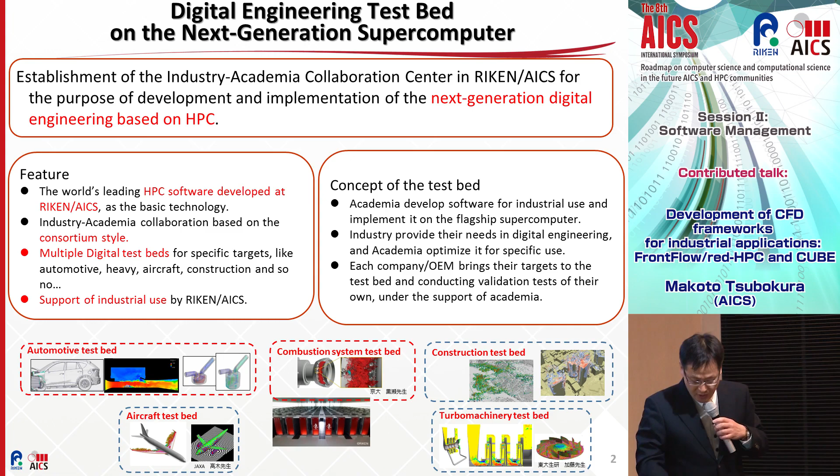So far, we have organized one consortium for automobiles. More than 10 OEMs and suppliers are joining this consortium, and RIKEN is the center of this consortium. But not only RIKEN, but also Hokkaido University, the University of Tokyo and Hiroshima University are now joining. It means we do not utilize only the RIKEN software, but other universities can also bring their own software to develop software for specific industrial use.

And now we are going to prepare the next consortium. That is for combustion systems, like gas turbines or something like that. For this consortium, the leader is going to be Professor Kurose at Kyoto University, and we are also joining this consortium, and they are going to utilize our software developed here.

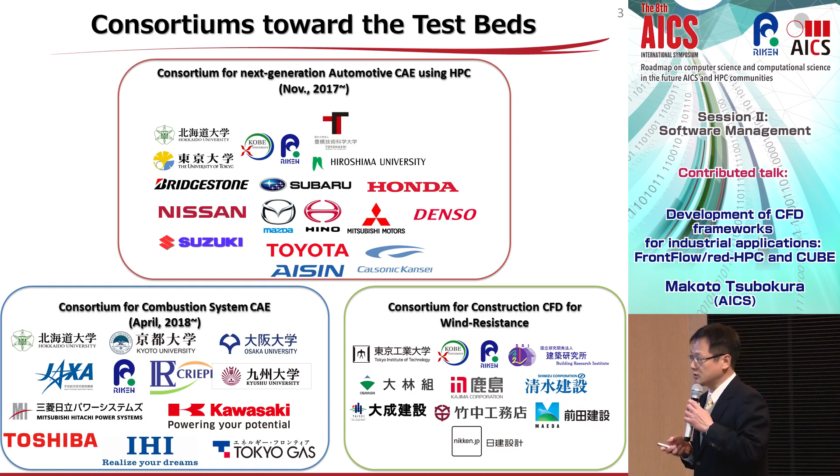And the third one is going to be the construction companies consortium. The leader will be Professor Tamura at Tokyo Tech, and also Kobe University and RIKEN are joining this consortium. Now I'd like to move on to the software development we are now conducting.

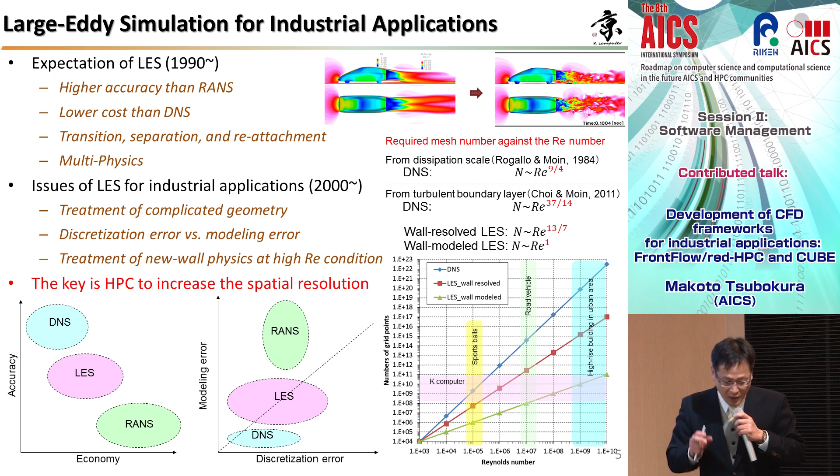Anyway, our main missions at RIKEN is to develop CFD frameworks to treat these industrial targets using a large eddy simulation. Also, I'd like to introduce the FrontFlow red. Actually, the history of the FrontFlow red is very long. It means that the national project launched in around 2002 to develop the unstructured vertex-centered finite volume method for industrial use.

So history is more than 10 years, but in our team, our main mission was to optimize this FrontFlow red on the K computer. So far, the single node performance is about 10%. Actually, this is quite high, I think, for the unstructured finite volume. And for the parallel efficiency, so far they can treat more than around 10 billion numerical elements on the K computer using 10,000 numerical nodes, which is equivalent to 80,000 cores.

The advantage of the FrontFlow red is we use unstructured mesh. So the accuracy is quite high because the complicated surface is reproduced by the unstructured grid. Another important feature of the FrontFlow red is that they can treat the moving boundary problems as shown here. So we can conduct coupled simulations of flows and some solid motions.

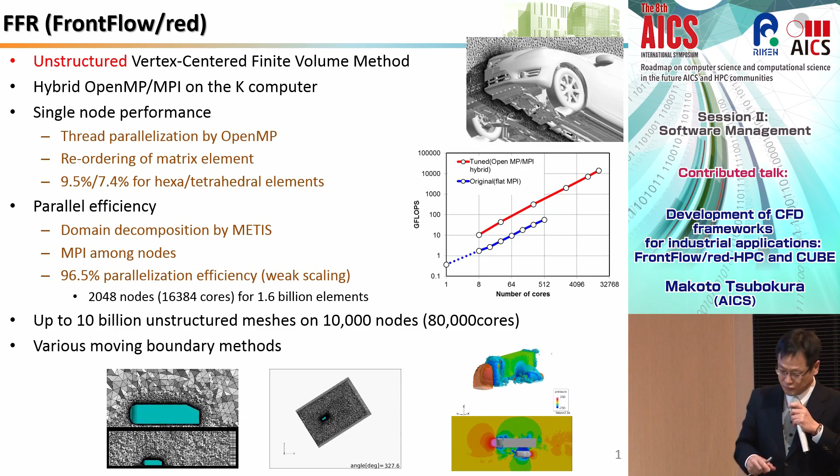First, I'd like to show you the advantage of these types of unstructured grid systems from the viewpoint of the very fundamental physics. As you may know, the flow physics of drag crisis. That is the phenomena that when you increase the Reynolds number, the drag of the sphere or the cylinder is drastically decreased at some specific Reynolds number. This is called the drag crisis.

And the physics is quite complicated, which is relating to the separations of the boundary layer on the surface, and there is a small reattachment, detecting a transition to turbulence or something like that. So if you would like to precisely reproduce these types of physics, you need very, very fine grids on the surface.

If you have a commercial software, just try to conduct these simple sphere simulations, maybe you cannot capture these tendencies. Very small numerical dissipation or something like that drastically affects the transitions, and as a result of that, this tendency cannot be captured if we use software as a black box.

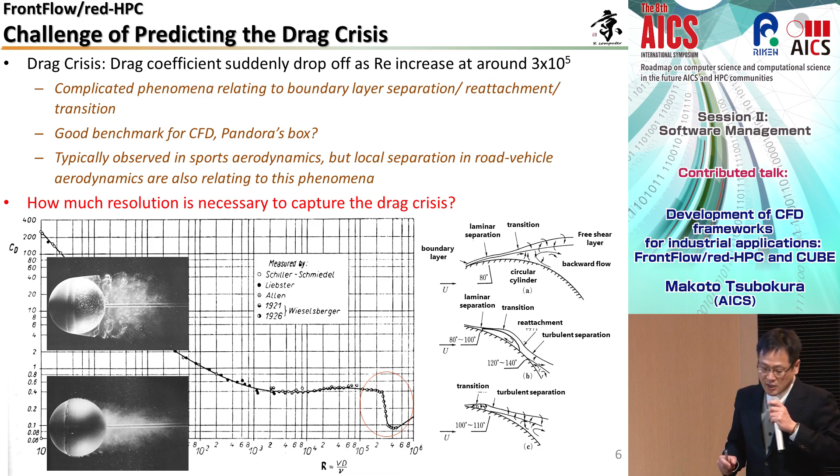So we first conducted these simple sphere simulations using FrontFlow red by specially tuning the grids on the surface from the viewpoint of the reproductions of the boundary layer on the surface. So the parameter to determine the resolution is the theoretical boundary layer thickness on the surface, and we use a prism mesh on the surface and away from the spheres the tetrahedral mesh.

But anyways, here the delta is the thickness of a boundary layer, and we intensively change the resolutions for the horizontal directions as well as the vertical directions. This result is quite interesting. Look at that. This is a drag coefficient, okay? And we set up the same Reynolds numbers for these 4 cases. And we just change the surface resolution.

At the same Reynolds number, at the same numerical conditions, the only difference is the resolutions, and the results are quite different, as you see. If the grid is relatively coarse, the drag is evaluated very low. But if you increase the resolution, it's going to be higher, it's almost double. So if you change the resolutions, the drag is going to change about twice larger. So this intensive mesh dependence test is quite important.

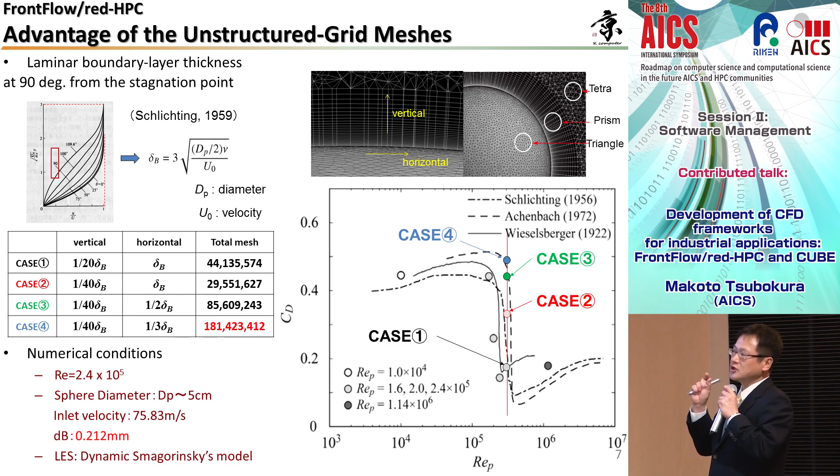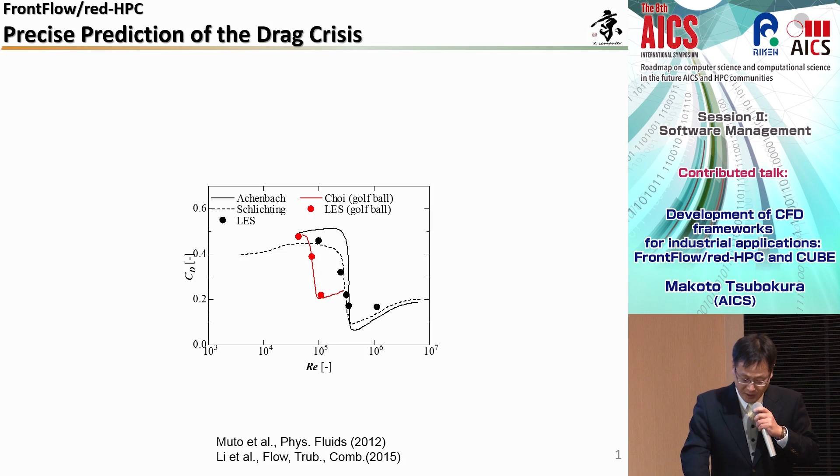But after this intensive test, we can finally precisely capture the tendencies of this drag reduction. Here, this symbol is a result of simulations, and this broken line is a result of experimental data, and this red is a golf ball case, and this black one is a smooth sphere case, and it shows a very good agreement with the experiments.

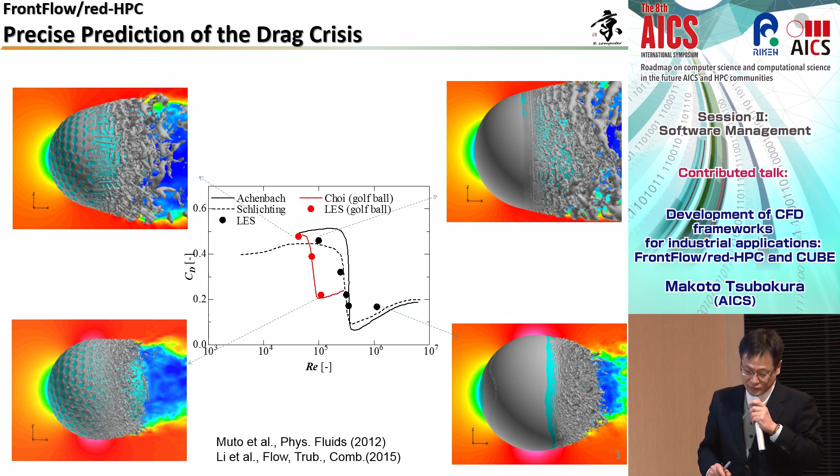This is a well-known phenomenon, but you can capture everything on the surface when you use the K computer, and you can optimize the dimples' shape, locations, and depths based on these simulations. And you can also observe the surface transitions in the case of golf balls. And now we have a collaboration with the manufacturers of golf balls to optimize these dimple shapes.

But anyway, what I'd like to say here is when you use an unstructured grid and you can fine-tune the grids on the surface, you can obtain almost the same results as experiments for these simple geometries. So we have applied this FrontFlow/red to the much more complicated case of a road vehicle. For a road vehicle, the Reynolds number is 2 orders of magnitude higher than golf balls. So we cannot solve everything, but still we can do very precise large eddy simulations.

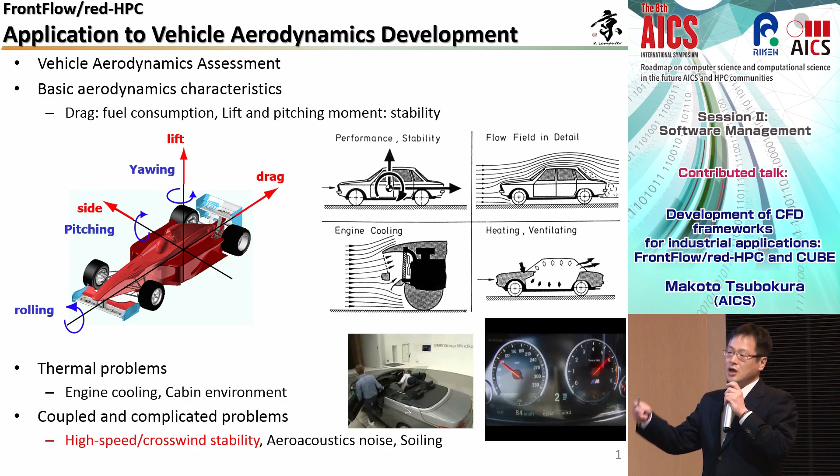Here, our main target is to evaluate how CFD can reproduce the experimental data they are conducting in the industry. So for that purpose, first we are going to check how precisely we can capture the drag coefficient obtained in the wind tunnels. And we also try to expand the uses of CFD on HPC to targets which a conventional wind tunnel cannot capture. So far, industry is very conservative, so they would like to use CFD as an alternative to a wind tunnel test, but we'd like to expand its possibility to something which a conventional wind tunnel fundamentally cannot treat.

Yes, this is the possibility of HPC. As I told you, first is, of course, doing high-resolution simulations. You can reduce the numerical errors or the modeling errors in the large eddy simulations. As a result, you can obtain almost the same accuracy as the wind tunnels. So in the near future, with HPC, you do not need a wind tunnel anymore. Everything can be done with CFD.

But the second thing, I think, is much more important. This is real-world coupling simulations on the high-performance computing environment. By doing this, you can do some experiments, some evaluations which conventional experiments cannot do. I'm going to show you some results of that.

And the last one is big data analysis. This is actually a very new topic, but we'd like to conduct simulations running hundreds to thousands of jobs simultaneously to generate an optimization map, and also use those results for deep learning to try to find an optimized aerodynamic shape for the road vehicle.

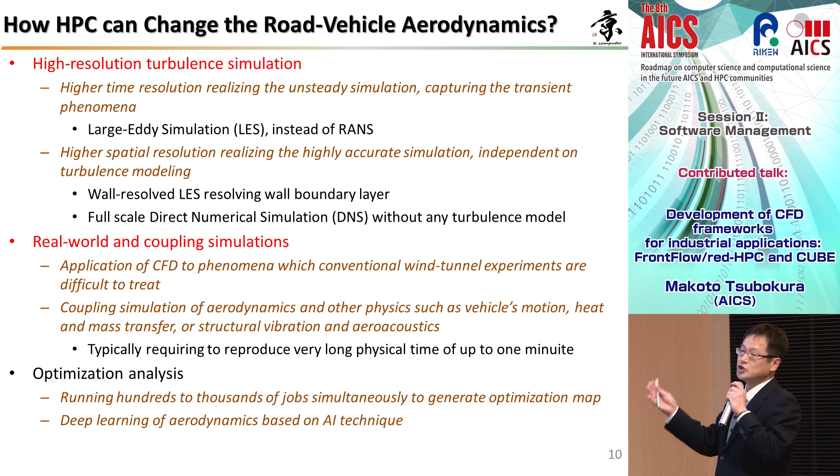This is the result of FrontFlow/red on the K computer to evaluate how FrontFlow/red can replace the wind tunnels. The target is a light vehicle manufactured by Suzuki. The shape is slightly different; you see, the rear angle decreases. So the point is that our simulation can precisely capture the tendencies of the drag change. First I'd like to show you the experimental data, which is shown in blue.

It is very interesting that when you decrease the slant angle, people sometimes guess the drag is going to decrease monotonically, but that is not correct. It first decreases, then slightly increases, then decreases again. There is some interesting fluid physics behind that, but I cannot explain it today, so I will tell you later if you are interested. But the point is whether or not CFD can predict this tendency. I want to show you two results.

One is the coarse large eddy simulation indicated by this red color. This is conducted on the conventional supercomputers used in the company. The total mesh number used here is about 35 million, and the surface resolution is 2 millimeters. Then we increased the resolution on the surface down to 0.5 millimeters, less than 1 millimeter, on the K computer using 2.3 billion numerical meshes. The result is shown by this green color.

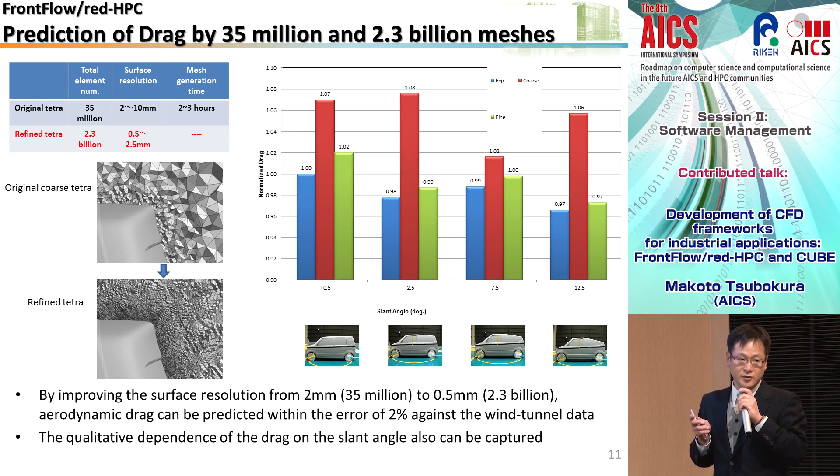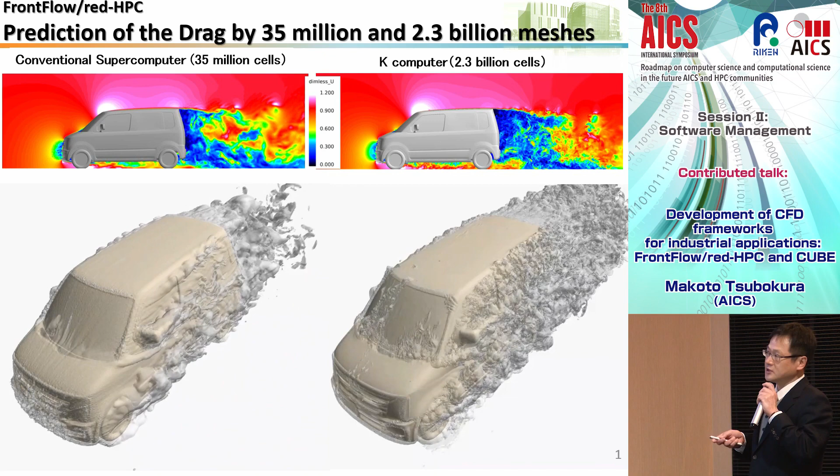So if you can obtain these accuracies by increasing the resolutions to less than 1 millimeter, you can obtain almost the same results as a wind tunnel. So you do not need a wind tunnel anymore. And this is a result of the flow field. This is the conventional large eddy simulations used in the OEMs, and this is a K-computer result. By increasing the resolutions, you can capture much smaller eddies on the surface. And this is the possibility of the replacement of the wind tunnels by CFD.

And the next result is expansion of the possibilities of CFD to targets which a conventional wind tunnel fundamentally cannot treat. That is a coupling simulation of road vehicles and their motions, and also the driver's reaction. Here, we compared two vehicles subjected to crosswind. It's a very strong crosswind of more than 10 meters per second from the side. And it's a stepwise side wind. In such a situation, the vehicle's motion is going to be very unstable. And drivers always try to get back to the original lanes when the vehicle is subjected to these crosswinds.

We conducted the simulations of these situations by coupling the fluid around the vehicles, 6 degrees of freedom of motion, as well as the driver's reactions. This is the result. This is the time series of a vehicle's yaw angle change, as well as the driver's reaction. That is very interesting. You do not need a real vehicle. Just obtain the CAD data, then you can evaluate the vehicle's high-speed stability at a very early stage of development.

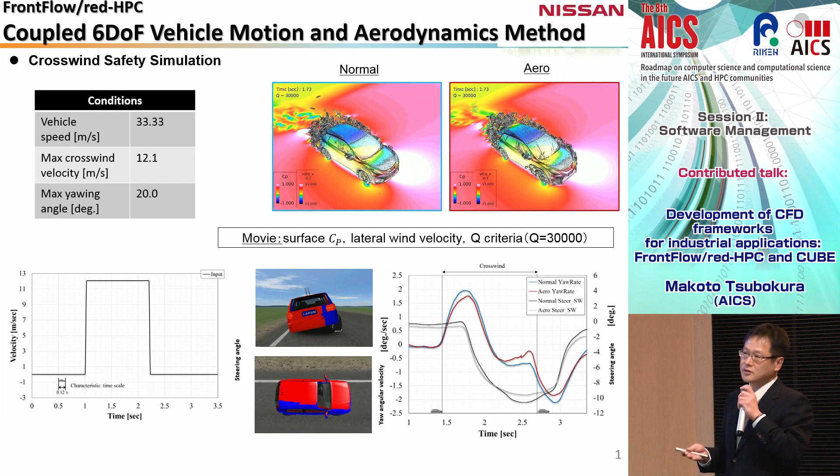Of course, this evaluation can be done during the development process at a very late stage. At the very last stage, you can do that when you use prototype vehicles, but you cannot do that at the very early stage. But you can do that if you use CFD. So this is a new possibility of simulations. Not only the replacement of wind tunnels, but beyond the wind tunnel. So the situation is very optimistic and very happy if we show these results to industries.

But still, industry cannot use these simulations, FrontFlow, in their own production process. Why? The reason is very simple. The main problem is the mesh generation. As I told you, when you increase the resolutions from 2 millimeters down to 0.5 millimeter, the accuracy is almost comparable to the wind tunnels. But when we look at the real vehicle's shape as digital data, the digital data is something like this. This is a close-up view of the vehicle's rear end corner. There is a back door here. This is a roof panel here. This is the side panel here.

The problem is these gaps. The CAD data or industrial shape data always includes such gaps, overlaps, holes, or something like that. And when you conduct simulations with CFD, you always have to modify the surface. In the case the resolution is more than 1 millimeter, surface repair is quite easy. You just use commercial software, and you can automatically eliminate these gaps. This is the so-called wrapping technique. But as I told you, if you would like to replace the wind tunnels or experiments by CFD, resolution should be less than 1 millimeter.

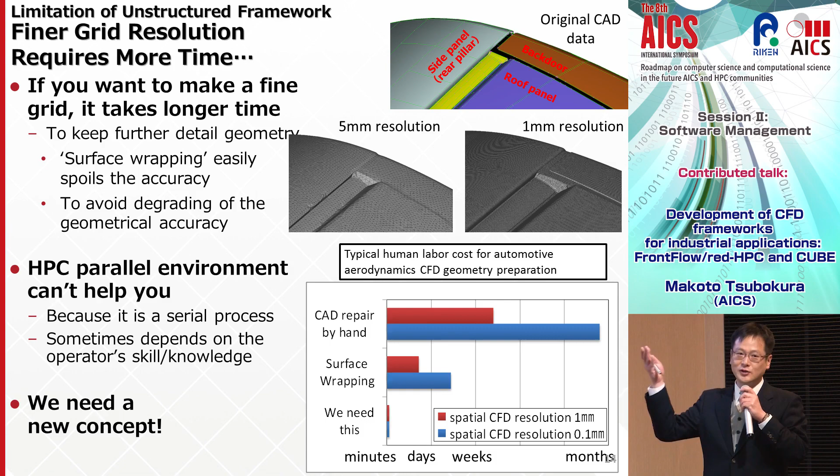So we would like to propose an alternative. This is the second simulation, called CUBE. This is based on the hierarchically structured grid. The other methods are almost the same as FrontFlow. We use a finite volume method; the only difference is the data structure. We do not use unstructured mesh. We use a hierarchically structured mesh.

The important feature of this simulation is that we solve not only the fluid, but also structures or something like that in the same framework. And on the surface, of course, in this case, we do not reproduce the surface precisely because we use a hierarchically structured grid. So the surface has to be modeled by using the immersed boundary technique. And using this immersed boundary technique, we developed a method to repair the surface automatically.

We don't have to repair the surface in this case. It is automatically repaired. And also, we develop some fluid structure coupling analysis based on that. I'm going to talk about that later. But the most important thing is two features. First, it is very suitable for high performance computing.

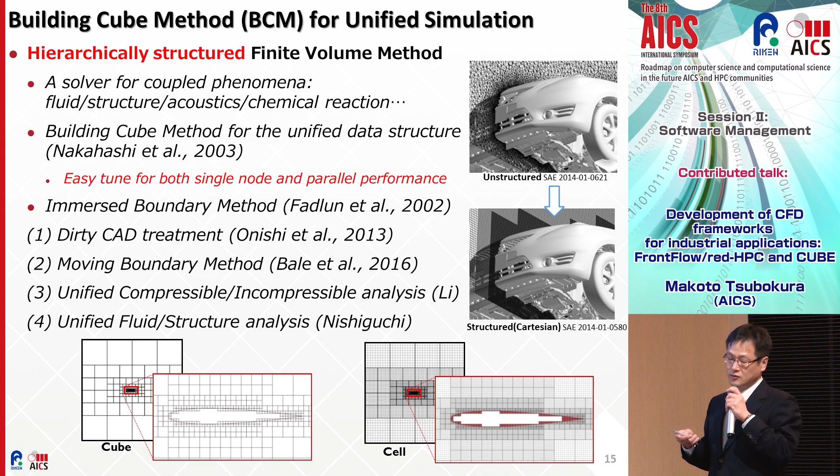And the second one is automatic CAD data repair. So you do not have to generate the mesh by yourself. It's automatically generated. And this is some typical results we obtained. This is the maximum case. We use 27 billion numerical meshes with a surface resolution of 0.7 millimeter. As I told you, in the case of unstructured grid, you need resolutions of less than 1 millimeter for the higher accuracies comparable to wind tunnels. We do the same thing, using 27 billion meshes.

Guess how long it takes to generate the mesh? It takes less than 1 hour. In the case of unstructured grid, it takes 3 months. But when you use this hierarchical structured grid, it takes less than 1 hour. And you can do the simulations. Of course, it needs much CPU time, but still, it is within the target of industrial use. 3 months is terrible. Less than 1 hour, it's possible to use in the industry as long as they have very large scale hardware.

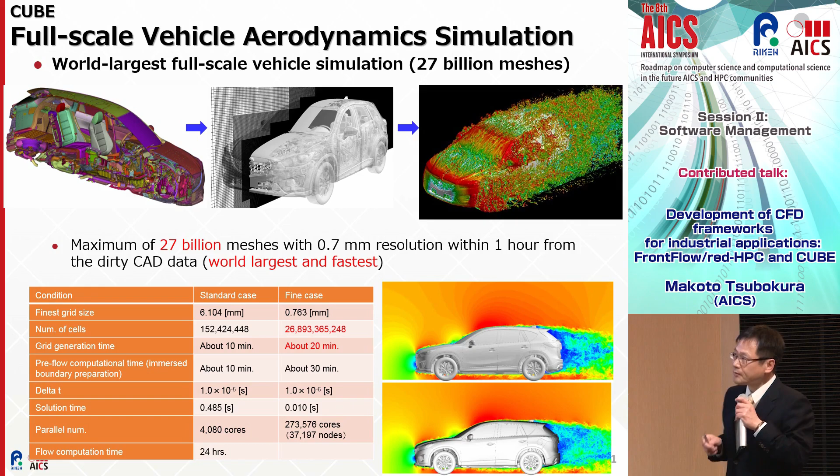And another important feature is this moving boundary technique, but I'd like to skip these ones. Maybe I'm running out of my time, right?

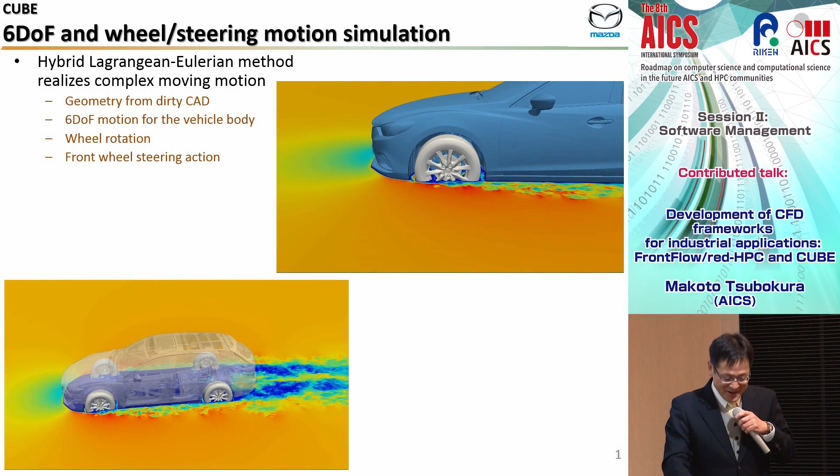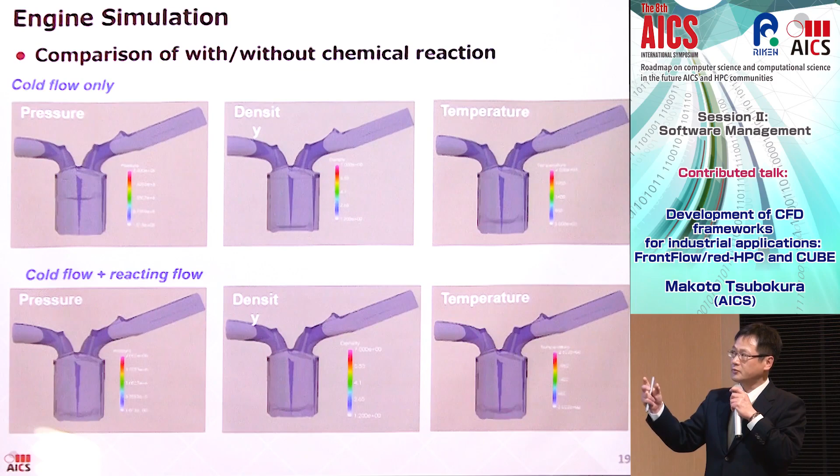And these are the 6 degrees of freedom simulations, and this is engine simulations, because we do not deform the mesh. The mesh is fixed, and we only treat the moving boundaries by using immersed boundaries. So very complicated motions can be easily captured. And also, we solve not only the fluid, but also the structures on the same fixed grid. This is the so-called Eulerian approach for structure dynamics. So you can solve everything on a single mesh of the hierarchically structured grid.

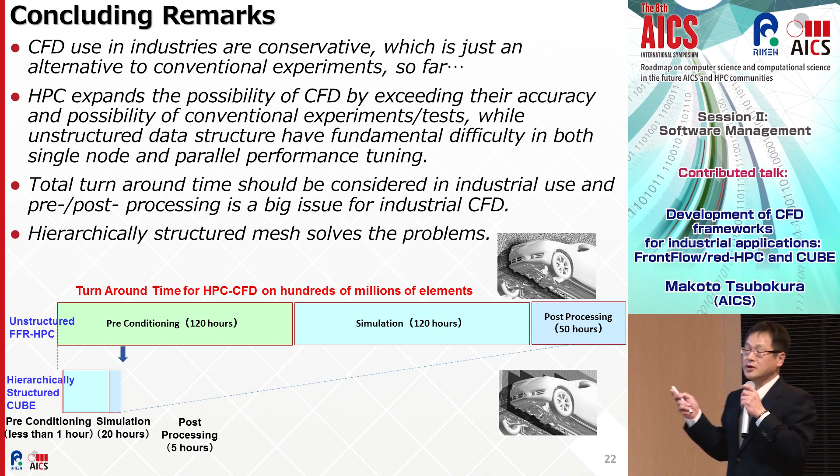I'd like to conclude my talk with 2 points. One is that CFD use in industry is very conservative. So still, FrontFlow Red is very popular from the viewpoint of its accuracy. But if they would like to expand its possibilities using HPC, Cube is very promising. This is a case where you conduct hundreds of millions of meshes simulations of a road vehicle. It takes 120 hours for preprocessing, simulations 120 hours and post-processing 50 hours. But if we use Cube, preprocessing is less than 1 hour, simulation is about 20 hours, and post is 5 hours. So you can drastically decrease the total development time.

In that case, it's impossible to do everything in our team. So we need collaborations with operation teams for this support, and also the optimizations for the specific industrial targets. Someone has to do these two things simultaneously. So collaboration between the research team and the operation team is going to be very important.